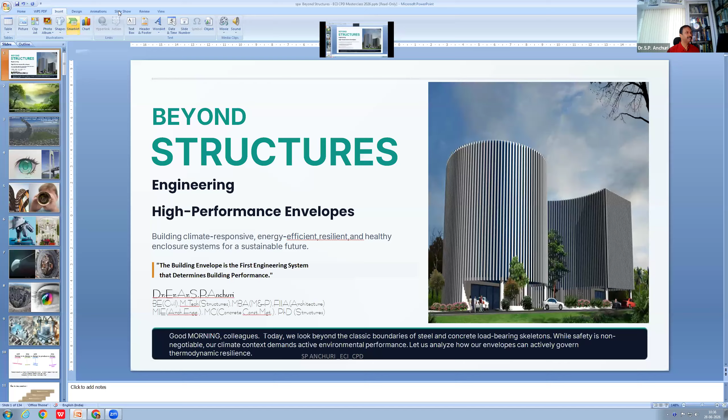Now, today I'm going to talk about beyond structures. We normally discuss the structures and the inner side, but we wanted to discuss something which is outside. So first of all, I would like to welcome you to my talk, and namaste everybody, because there is a cross section of the construction industry. What I'm seeing is all very eminent people have joined. So once again, namaste. In fact, from Pan India.

So the engineering of high performance envelopes, what it will be. Today we know the building should be climate responsive, energy efficient, resilient, future ready, healthy enclosures, which can be a sustainable future. And in fact, friends, the building envelope is the first engineering system, and building performance depends on that. So envelope is a very, very important thing. So good morning once again.

Today we look beyond the classic boundaries of steel and concrete and load-bearing skeletons. While safety is non-negotiable, our climate context demands active environmental performance. So let us analyze how that governs and how that particular system is synced with all other systems. So my presentation is a little different than the regular pattern. I'm trying to put it in a different format. I hope you all will like it.

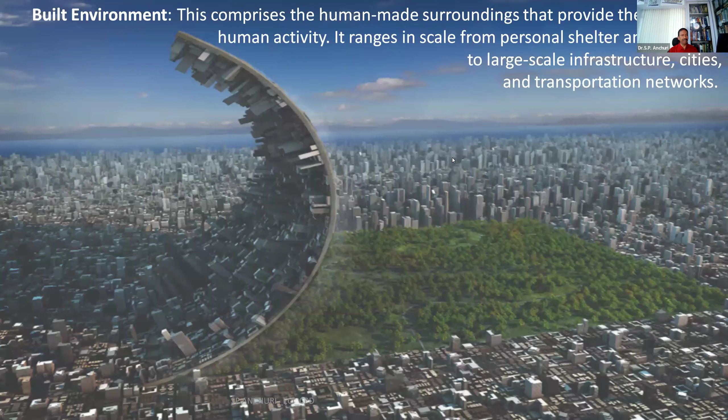In fact, when you think of the built environment, which comprises so many things, the human activity, basically what I'm talking about today is a man-made world, which ranges in scale from personal shelter to buildings to large-scale infrastructure, cities, and transportation networks. When it comes to the built environment, buildings are predominant. So how we need to integrate, how we need to think as a collective approach, that we will discuss today.

But when it comes to buildings, we have several types of elements in them. When it comes to the exterior, which I normally call an enclosure or envelope, they are all microscopic. We go a little closer. Bridges will be at a distance, dams will be at a distance, and some structures will be at a distance, but buildings are very near. So those are called microscopic structures.

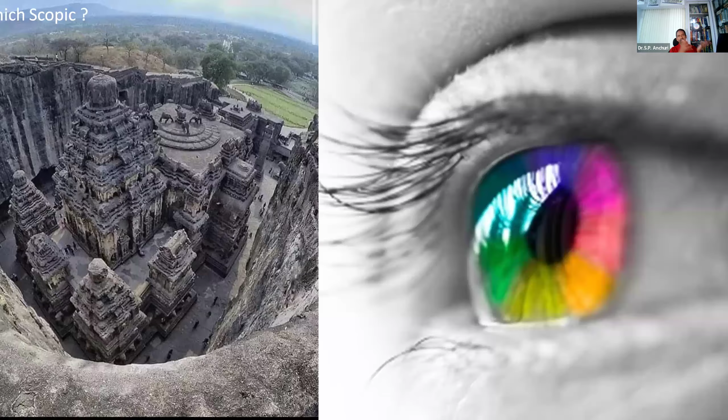But friends, when we go back 1,000 years, 2,000 years, some 2,500 BC, the master builder was the responsible person for everything, right from the planning, the designing, the construction or execution, and the operation and maintenance. The entire life cycle was under one person who was called the master builder.

That may be a temple. Like you see these carved structures at Ajanta, Ellora, Hampi, Badami, or even Mahabalipuram, these things are what scoping? Whether it's telescopic or microscopic or nanoscopic, that I need to decide. So everything they were thinking at a nano level. So we need to understand this.

But when I'm talking about today and the future, the entire thing is taken over by mechanization, automation, artificial intelligence, 3D printing, robotics. The other day, one post was very viral: one doctor is sitting in one country and he's operating in a hospital operation theater in another country. So that is medical engineering; to what extent we have gone.

So artificial intelligence, natural intelligence, and human intelligence have to come together. Even if he's sitting there, he has to operate. Means human intelligence is above artificial intelligence; the person who knows artificial intelligence will naturally have more of a command, be more result oriented. So where are we going?

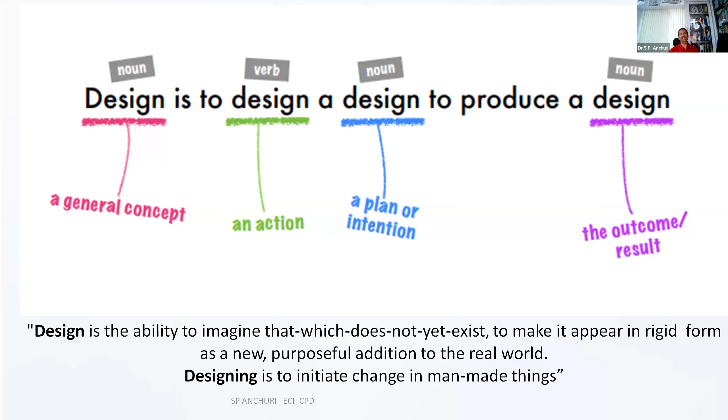Friends, designing is to initiate change in man-made things. And engineers have a very, very important role. And when I say engineer, it's not just civil, mechanical, electrical; there are more than 20-25 streams. And I'm happy that I'm a part of the Engineering Council of India as a member and PE, where all these different stakeholders come together and build the nation.

Friends, when we started about 25, 30 years back, I think the disciplinary approach was more. Instead of cross-disciplinary, multidisciplinary or interdisciplinary, they used to concentrate on their own disciplines. But today, with advancement and industrialization, every sector is developing. For example, building information modeling or any automation, everybody has to come together. We can't work in isolation or in silos.

But today, due to this new generation thinking or future scope designs, multidisciplinary or interdisciplinary is also a little lacking. So what we need is transdisciplinary. We need to know what for you are doing, when you have to do it, how you have to do it, and what goes behind the thinking process of that particular thing. Then only we can come up with vital results. That is transdisciplinary.

And what is transdisciplinary? In my understanding, it is conceptual frameworks that are adopted as a wider perspective within research and practice. Even though they may have their origins in one discipline, they have grown to be used across multiple others. I have practiced this for about a decade now to bring out buildings and the built environment. Basically, I am in the building sector. So we can see how transdisciplinary concepts can be utilized to make those buildings high performance.

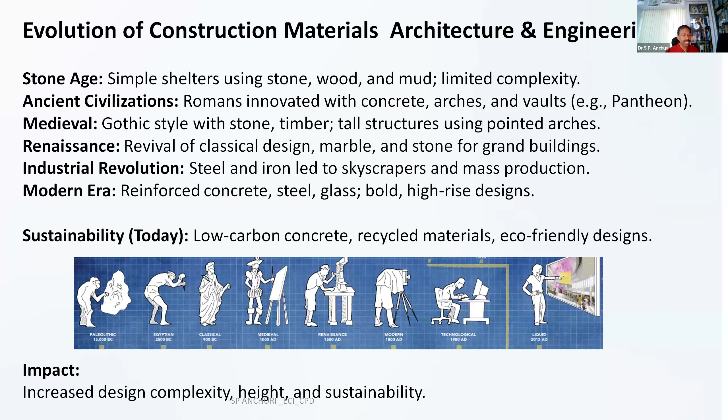Yes, you are somewhere in the corner of the world, but we are connected. So a lot of energy is saved, but we need to understand the logic behind that. Coming to the structure, which is an integral part of designing architecture.

And when it comes to the synergy of architecture, structure, form, and all the things, I'm taking the word architecture because the planning starts basically from the architect's table or the architect's mind, and then the entire thing follows. So when the architect designs, in fact, being an architect and structural engineer with a kind of multidisciplinary engineering education, I understood that the thing starts like story writing.

When you write something, then the entire picture follows, and every element, every person in the entire movie making or that particular design or whatever object, I think everybody is important. So here we need to understand each role and then club accordingly.

To start with, the projects in which we are involved: for 25 years I have been involved in projects right from CM to CM. That may be a common man to the chief minister, or very prominent buildings at the same time. Very simple buildings I also undertake, and I involve a transdisciplinary conceptual approach.

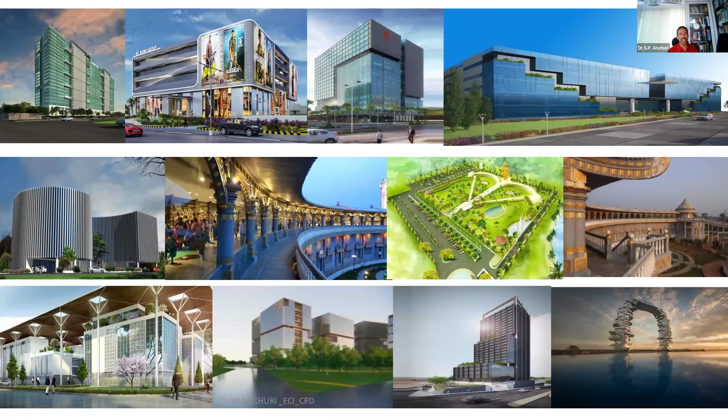So there are some typical buildings which I have done, right from the mythological part to modern buildings, temples, and whatnot. I mean, different kinds of institutions, glass buildings with different forms, and all. So I was fortunate to be involved in these projects for long. There are very few which I wanted to just

inform you about. This is one of the heart-touching and my favorite, the Anchuri family's design, in Vijayanagaram near Visakhapatnam. This is a mythological park. About 24 years back we designed this, and it is in an arrow and bow shape, where the entire Ramayana is depicted in the form of three-dimensional sculptures.

On the ground floor, first floor and other floors, we have Veda Patashalas, Agama Shastra research centers and other things. So it's a very typical thing. Not only structure, not only architecture, not only building services, but here the involvement of Agama Shastra and the sthapatis was more. Accordingly we need to have that.

If I design a hospital, doctors' input will be there. If I design a temple, I need to have Agama Shastra and sthapatis' input. Every element we have to take care of. That is nothing but a transdisciplinary concept.

When it comes to structures, there are several types, which may depend on the structural system and the forms: one-dimensional, two-dimensional, three-dimensional structures. Based on the application, whether it's a bridge, aqueduct, canals, dams, railways, roads, and airports. Based on the materials, for example timber, concrete, metal, aluminium, whatnot. Today we have a good number of products which can be used.

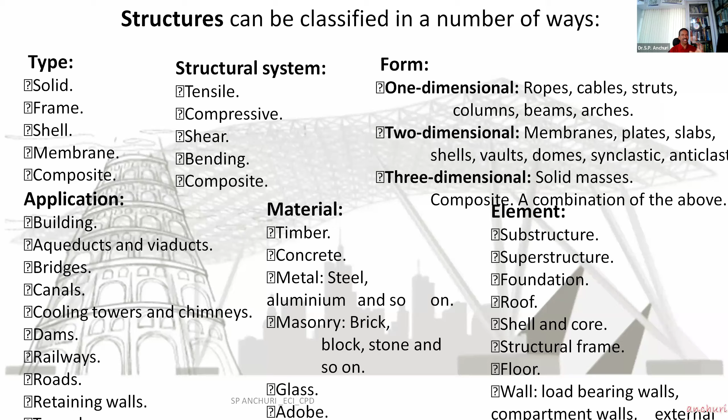But today we have 100 variants in each company, and n number of automobiles: electric, diesel, and whatnot, with different fuels, different manufacturing and different types. So it has grown. And element-wise structures may be superstructure, substructure, foundation, roof, floor, walls, shells, and all. So which element is going to be part of the structural system as an envelope, we are going to see now.

But for any project, as we have the Panchamahabhutas in the world, I think planning, designing, execution, operation, and maintenance are very much required for the balanced design life cycle of that particular project or building. But for any project to be thought of, feasibility is the starting point.

Functionality is what the space is used for. Technology, the engineering of the building, endless options are there. Sustainability, which we have been learning for a few decades, is the need of the time. Innovation is the design, shape, and construction. But friends, today we are going for beauty, aesthetics. It should look good. But I think correct is beauty, but beauty is not always correct. These are my common slides in every talk, because they are basic fundamental things.

But structure is not only a structure. It's like the inner engineering we have. It's my body, I may be fit, but my inner engineering should also be fit. Only aesthetics or only the body is not enough.

For example, I have a phone, a system - everything hardware is good, but we need software too. With programs and everything working collectively, it can perform well. So today we are going to talk about the structure or building which performs well, which is the need of the hour. Before going into that, I wanted to relate the structure and the space.

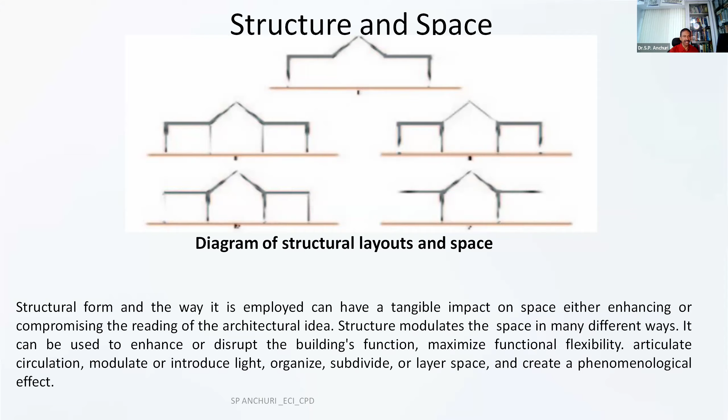In this particular picture, you can see structure for enhancement or disruption of functions. Sometimes, like the Leon School of Architecture, it looks good but disrupts the entire space. When the structure is effectively used, it can help define the nature of the space. The structure can also disrupt the function of a building wing, but this is rarely the deliberate intention of the architect.

So we need to understand the basic function. At the same time, the space is what we are designing - whether it's column-free space, or whether height and headroom are also very important. So this is structure enhancement - in this particular case, structure for maximizing functional flexibility.

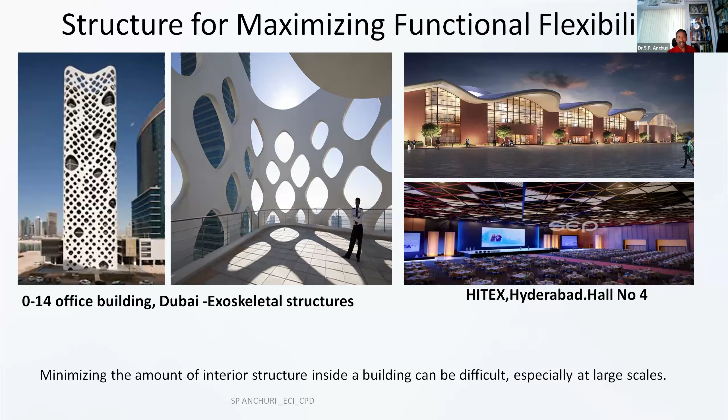On the right side, the HITEX in Hyderabad, Hall Number 4, is one of the biggest in the country, where you can host about 10 to 12,000 people under one roof. It's not like Bharat Mandapam, but it's multi-purpose and recently came up. Minimizing the amount of interior structure inside a building can be difficult, but for large structures today we have the technology, so structure should be designed accordingly.

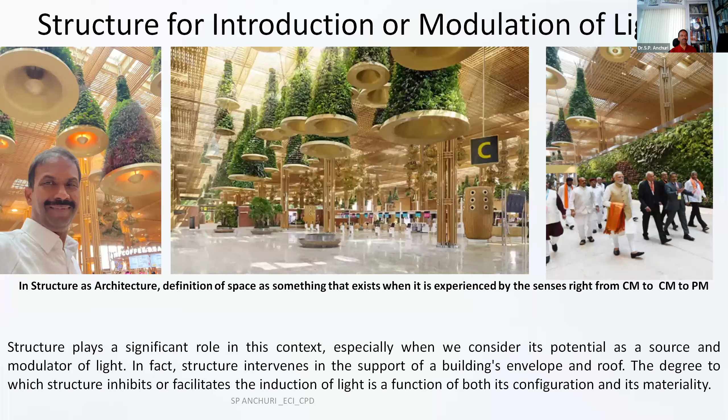The structure for introduction and modulation of light - friends, you might have seen this particular structure, the Bangalore new airport, based on bamboo design, with natural ventilation inside. The Prime Minister inaugurated it a few years back, and this is one of the favorite facilities which can be enjoyed thoroughly - not just for flights, waiting and shopping, but you can feel the difference when you go inside. It's one of the wonderful projects, as per me, in the present time.

Now, structure for organization, subdivision, and layering of spaces - that may be the atrium, the facades, or a freestanding row of columns. So this particular thing has to be integrated accordingly.

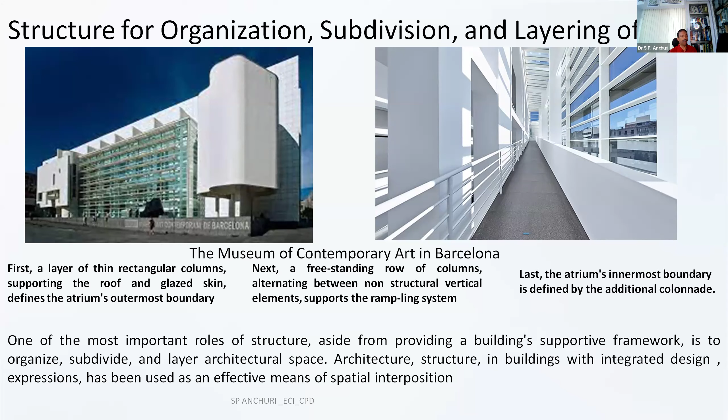This particular building is our own T-Hub, around 11 stories, 3.5 lakh square feet, which is an incubation center - when enterprising minds come here, they get instigated or influenced to do better. Startups, corporations, government, academia, and investors drive transformative changes here. This inner courtyard and these external aspects or prospects definitely attract people, giving a different kind of output.

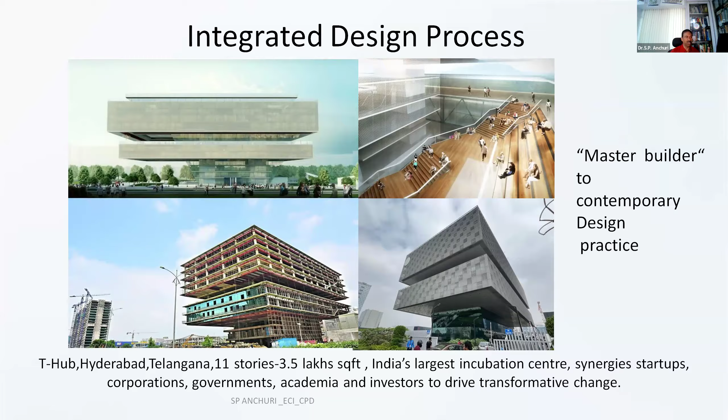So the structure plays a vital role. Is it a new thing? I don't think so. Ornaments in the temple and buildings, if you go to the south or any temple, Madurai Meenakshi temple or Surya temple, Mohenjo-daro, Harappa, or Khajuraho, or any structure, when the ornament and structure become a single thing, strangely enough, the result is a new feeling of freedom.

So they have their own methodology of thinking. They follow some kind of rituals, some kind of ornamentation. So we need to sit with them, and then we have to design and execute accordingly. It's a very wonderful experience, in fact.

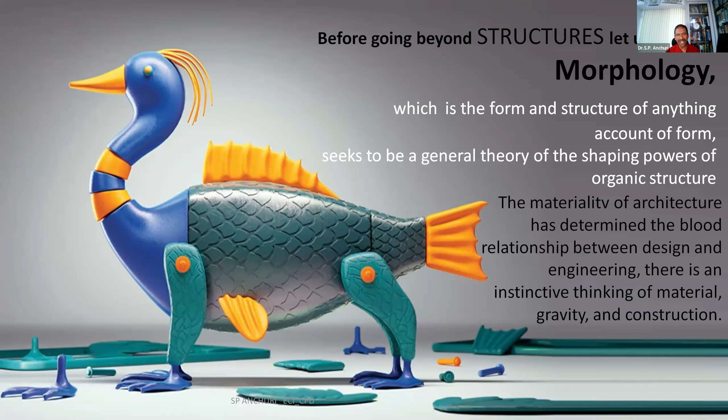Friends, coming to any object, for example, when we were kids, today we are going for more screen time. But in our times, or even today, we have that exercise. Today we are thinking of national education policy, where we must have some kind of exposure to the practical thing, and have talked to AICTE, where the first year, second year, third year, they are going into the industry or the field and trying to understand.

But when we studied in the 80s and 90s, or even before 2000, we had carpentry, smithy, electrical, everything. First year was common for all the branches, all subjects were compulsory. We went to each of the experimentation and laboratories. So we have different types of that logical thinking. I think that particular virtual thinking is to be improved when you are having a practical logical approach and when you touch those particular objects.

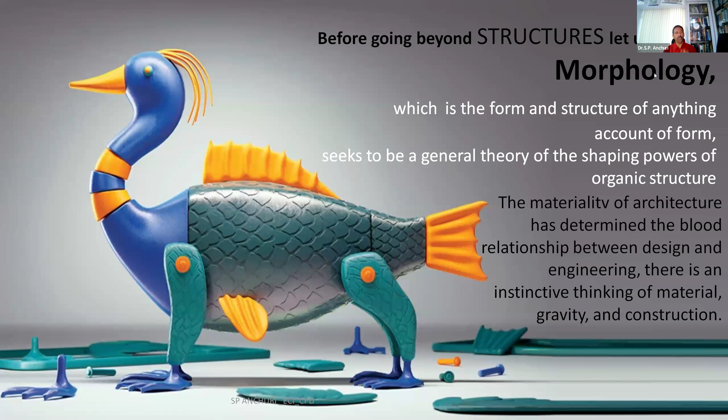So this is what in terms of structure. Before going really into the beyond structures, I think morphology is very important, which is the form and structure of an object, where anything is on account of the form, seeks to the general theory of shaping the power of organic structure. The materiality of architecture has determined the blood relationship between design and engineering, and there is an instinctive thinking of material, gravity, and construction, because the load part is very important.

So it's a very simple picture, but once you dismantle this, then we need to again assemble this. That's what the kids, they grow their thinking, challenge, and capacity through this mind exercise. So that's the beauty of building. Building is also an assembly of all the elements, joints, and each element is different, having different age, different output.

So that's what is the collective building, like a machine. Now, when it comes to different typologies, I will quickly go through 1001 Building Forms, very fast, which was the work by Francois. On the right side or left side, this is Frank Gehry's project, and the other side is a simple box element. If you go through Frank Gehry's works, he takes a sheet and he does like this, and this is predominantly the envelope or enclosure of the buildings.

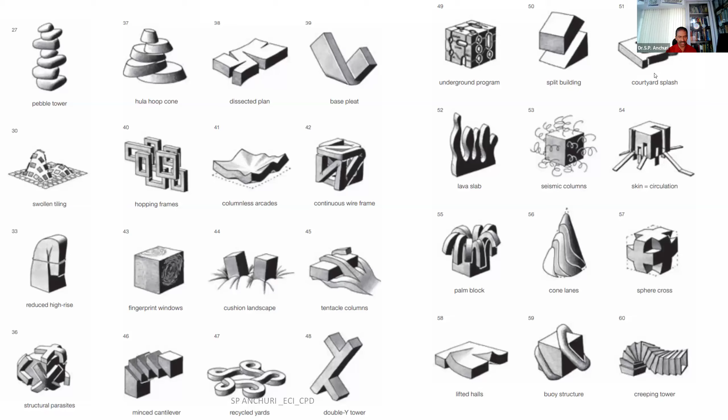So here you can see the forms of different buildings. These are all existing buildings, forms, which somebody has done here and there on the earth. This is only a collection of those basic forms. That may be a monument, that may be a building, that may be some kind of structure. So here you can just see how the list goes.

So these are all envelopes, these are all enclosures. Somewhere, maybe even Lotus Temple, Baha'i Temple, Burj Khalifa, Norman Foster's buildings and other things. Just see how there are these 1001 building forms by Francois Blanciak. You can just go through his beautiful book, how he has detailed these things.

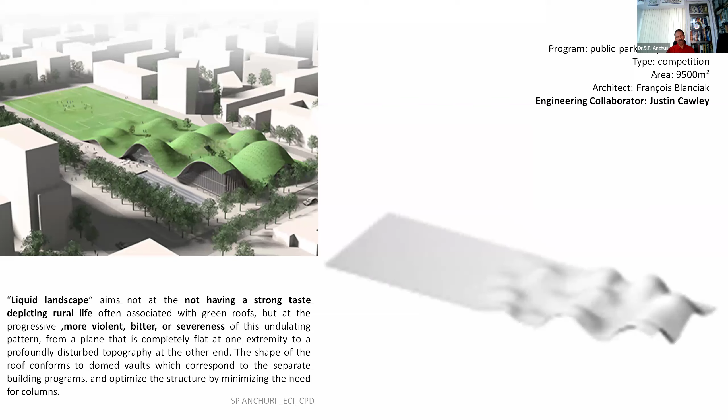So, friends, if you see, when the proposal comes, I'm reiterating and emphasizing the role of the engineering collaborator here. You may be having some idea of mechanization, some kind of idea of revolving it. So if you take the example of architect David Fisher, who is one of the dynamic architects, or James Law, they have different types of products.

Particularly David Fisher, his plates are moving - plates in the sense floors are moving or rotating. So how are those rotating? It's not only the structural engineer, not only the mechanical engineer, we need an automobile engineer, we need to control the aerodynamics of that, we need to construct, and also there are about 20-25 agencies required.

When I got the opportunity to talk to him, he said right from day one, when I think of something to put on paper, I concept it. For example, I want to have a speed, wind speed and all, I speak to Ferrari people if something is joints and fasteners, or to Bosch experts or wind analysts. So everybody, he takes the clarity and slowly forms the particular structure, form, which is the envelope.

So here you can see one side it's a lawn and play, and the other side, imagine when you walk on a carpet somewhere, if you have undulations - that became the project. This particular team has made such a wonderful arena, because sports facilities and other facilities are used by few people, but seen by many people. And being in the heart of the city, that landscape should be merged with the entire landscape.

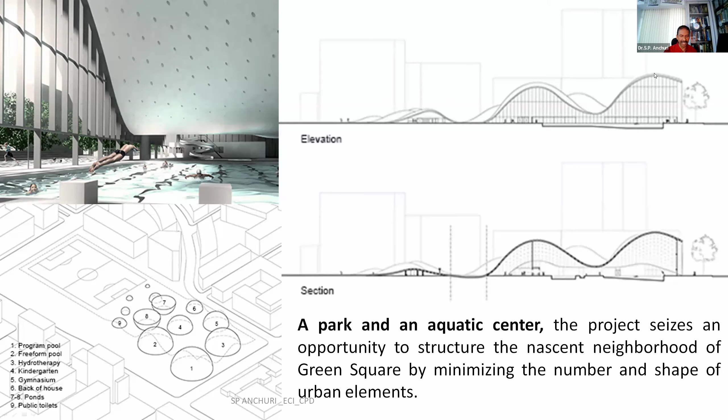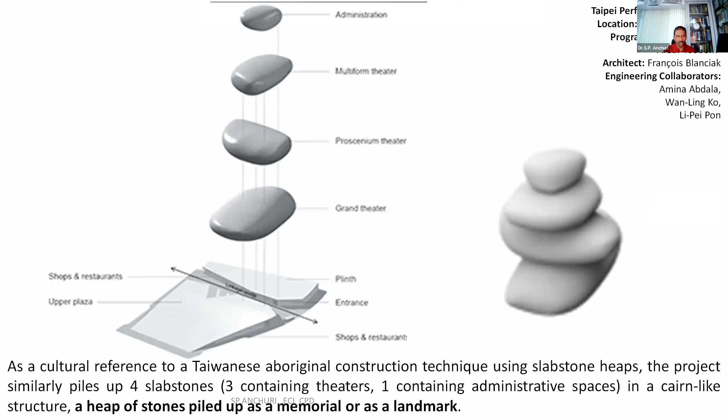Some people go for the flower of the nation, but even in Hyderabad we have rocks, so in this particular area these kind of monuments are more. The idea behind the development of this is like this - for example, how structurally they kept it, and how the overhang.

So inside the structural system and outside, for example, the other day I was talking to Abhayji, who is an expert in statues. For him there is no choice - if you want Sardar Patel in standing position, he has to take that position and do entire analysis. He can't change even one wrinkle on the face, or any shape, size or proportion of the human body, because it's true scale, like a portrait. So his challenge is something different.

You can go through his works - his company's name itself is Skeleton, because there's the skeleton and the envelope. So today I'm talking about the envelope, but we have to integrate that.

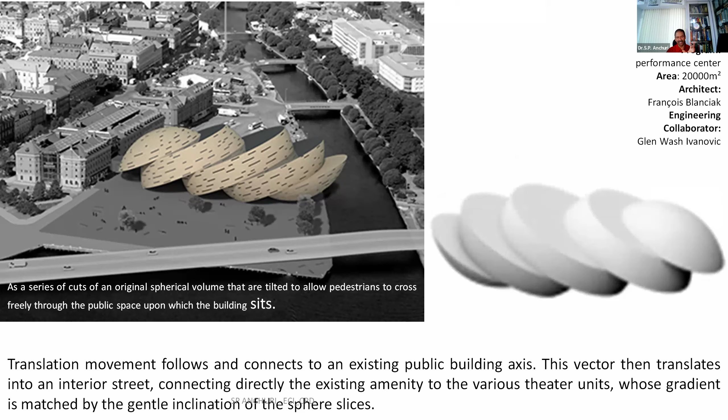So you can just see how the ball started, and the sphere, then they cut, and based on the orientation they angled it, and the generation of the form happened. So here's another important one - 23 spheres came together, interlocked, and were dissected or bisected within, and they came up with this particular beautiful project.

We had different eras. For decades, we mastered the structures. Yes, I'm not having any doubt about the structures. So, in terms of earthquake resistant, wind resistant or disaster resistant buildings, we advanced in structural analysis, design and execution. Considering the legacy of the projects, the robust concrete frames or solid brick infill or raw structures, we calculated safety with outstanding precision.

No doubt about that. However, this absolute focus left out building dynamics, or building thermodynamics. We forgot about building physics, creating massive energy-guzzling structures that rely on HVAC brute force to remain occupable. We have come from unconditioned spaces to conditioned spaces. Everything is air conditioned, whether it's, say, for machines.

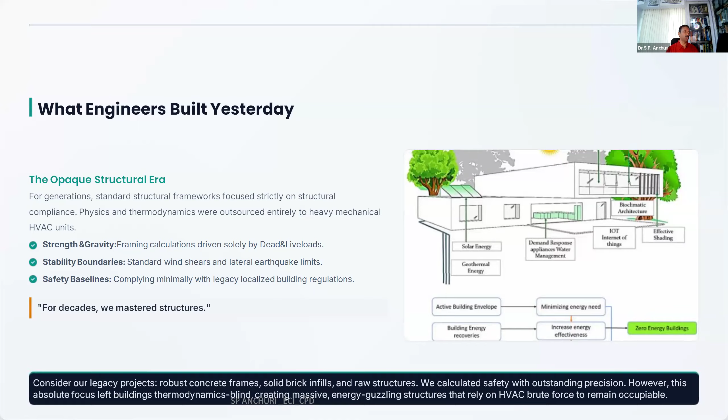I think nature has no condition at all. In a forest, no pesticide, no watering, it grows on its own, it's nature. So why can't we have our own building or system which is nature-based? I think we need to have less of active, more of passive. There, the engineer's role is more. So what must engineers build tomorrow? I think passive environmental systems.

As a building services engineer, you can reduce the consumption of energy in operation. But as a civil, structural, mechanical and electrical designer, you can reduce the energy during construction itself, because the form, the shape, the material used is also consuming a lot of energy. So for me, if you reduce the embodied energy, you are achieving good carbon footprints.

So here we need to harness natural daylight, breathe during the pleasant ambient hours, and maintain indoor thermal stability even during full power outages. I designed a number of buildings, and even where I'm sitting, my own small 8,000 SFT multi-floor house is a purely energy plus design. I generate my own power. I have good daylight and other things. So there is no air conditioning, or hardly I use any air conditioner in a year. So we need to understand that.

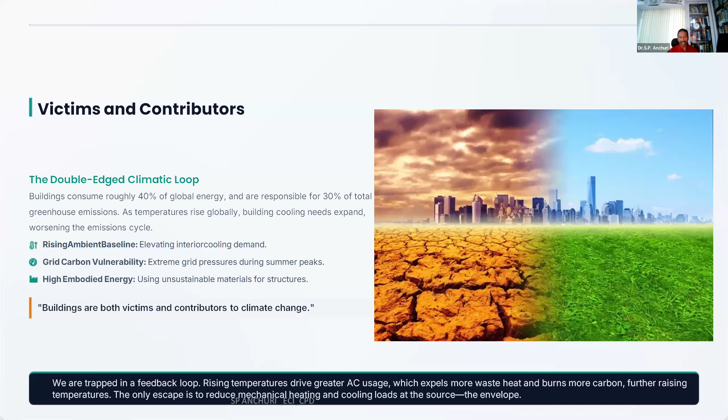So who are the victims or who are the contributors? I think buildings are both victims and contributors to climate change. We are trapped in a feedback loop. Rising temperatures drive greater AC use, which expels more waste heat and burns more carbon, further raising temperature. In fact, the only escape is to reduce the mechanical heating and cooling loads at the source itself. And the envelope should be designed accordingly.

So our future climate is already arriving. We need to understand the Indian heat wave is a reality. In fact, see the temperatures of the cities. If you take Delhi, it goes around 47 degrees, and Nagpur 50 degrees. And in most of the cities which are experiencing 30, 35 degrees today, the humidity level or the heat, the climate is different.

So we need to understand what the man-made interventions are and how we are spoiling it. The future of the climate is already arriving. We need to be very careful, at least for the upcoming built environment, and you can correct the existing buildings also. So cities are becoming a heat trap.

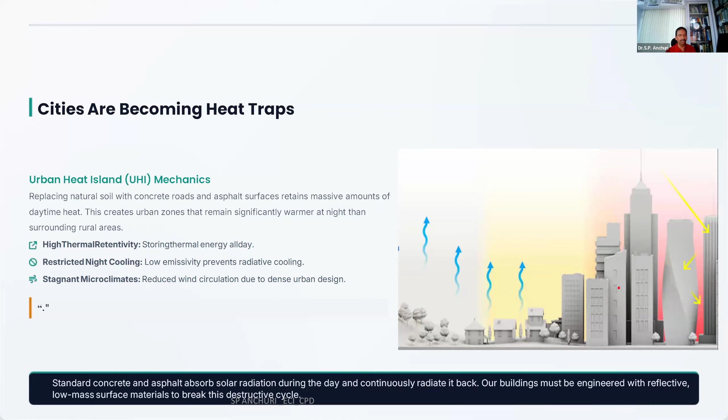Standard concrete and asphalt absorb solar radiation during the day and continuously radiate it back. Our buildings must be engineered with reflective, low mass surface materials to break this destructive cycle. I think we need to understand the urban heat island mechanism and then go for the design collectively.

So resilience is the new safety. We had fire safety, we had earthquake safety, so all types of safeties we need to design. Suddenly our zone 2 becomes 3, 3 becomes 4. But what about the existing buildings? So we need to design the buildings with the future in mind, leave out the present.

So based on the past, we have to design the present, considering the future. That's what the future ready building is. So resilience is the new structural safety. The traditional structural safety focus ended once the building stood firm. But today, we must guarantee complete water tightness, complete structural envelope integrity during severe storm.

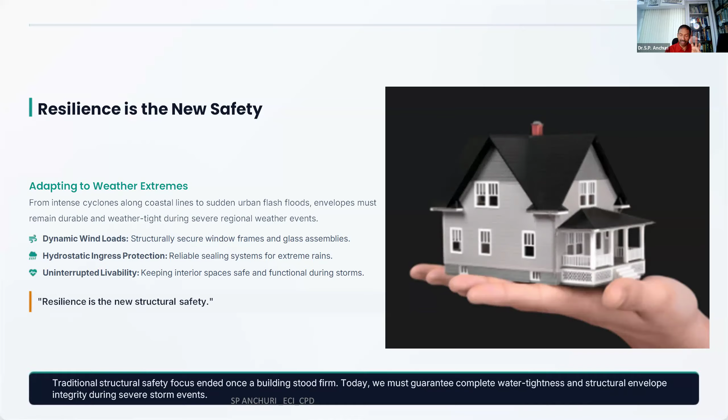Friends, envelope is a building interface, which is the roof or opaque walls. I always say, when a dot travels, it becomes a line. Line travels, it becomes a plane. When a plane travels, it becomes a solid. But earlier, our structures were solid. That may be a pyramid, that may be any kind of monument. They were not hollow, they were solid. For example, the pyramid was solid, but today's pyramid is hollow. So today, the requirement is different.

The function is different. So we need to understand the complexity of the geometry of the structure, the flow of the systems, and then we have to go with the interface. So the envelope or looks is the same, but inside it's hollow. So think of the envelope as a continuous wrapping; any break or poor transition between the roof, walls, and glass will compromise the entire building's energy performance.

You should think of it as a body, a human body. The other day I was talking about the anatomy. Even if my one finger pains, my entire body is going to be disturbed. So we need to understand each element of the building and then go about it. That's why I was comparing the human body and the envelope, where we have thermoregulation, airflow, moisture management. Buildings breathe, gain heat, lose energy, just like humans.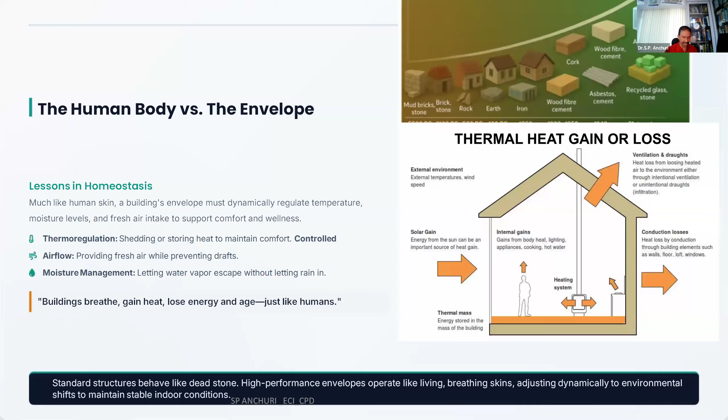We do Kapalabhati, we do breathing exercises, but for the building where we live, are we giving the required fenestration, the required air change? A toilet needs more air change, a kitchen requires more air change. No one thinks of that. So we need to understand each element in the office or any space, and we need to design accordingly. That is what I was comparing with the human body.

Now, thermal imaging analysis. Today we have everything. Earlier it may have been a little unavailable, but today we can simulate it. We have DesignBuilder and so many good software where we can simulate. Before even going for the final design, just like we analyze our structure, we can analyze our structure as a whole, as a body, as an envelope.

So where we can put the fenestration, where we can put the openings. Energy leaks are often invisible until measured. So we need some kind of scanners or systems where we can check the strength of the concrete, check the strength of the beam element. At the same time, we can study the performance of that room, the performance of the entire structure. So that is what we need to go for.

So building physics is a very, very important subject. Laws of physics are very important. We must know what is conduction. We must understand what is convection. We have to really seriously think of radiation. Pure heat movement through solid walls is conduction. Convection, hot air drafts circulating through envelope joints, and radiation, direct solar heat transmission through the glass. I think we studied this in the third or fourth standard.

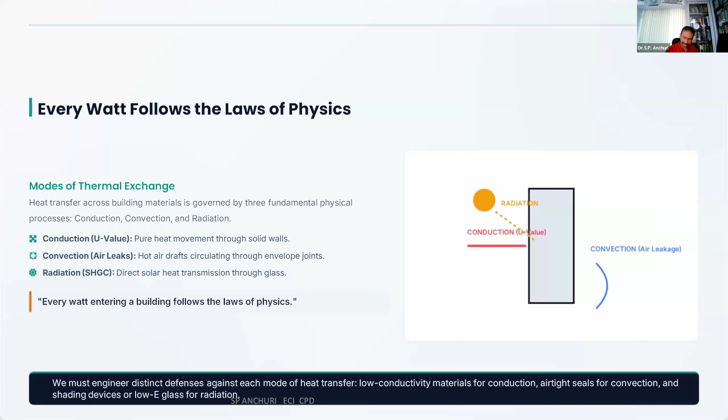We need to understand what is R value, what is conduction, what is U value. I can't have the same U value for Kashmir and Kanyakumari in terms of my clothing. Like that, we need to have food, shelter, and clothing accordingly. Now, the cost of uncontrolled solar gains. So, peak overhead solar demands. The sun is free, but uncontrolled solar gain is also expensive.

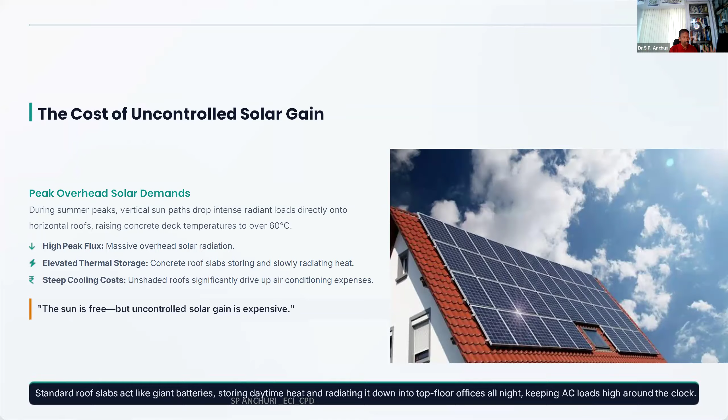We can see you can't plan anything haphazardly. So we need to understand. We need to calculate how much sun is required, how much energy we can produce, how the roofing system can be done, how the AC loads can be reduced, and what kind of a system we can use. So, visualizing the invisible load. These things are not visible. So managing long wave infrared energy is very important. What we cannot see often drives the energy consumption.

Sometimes leakages, we don't know the leakage. It's not only the water leakage. We need to control the leakages. We should not have any leakage in the room, especially in terms of the usage when you are designing some kind of machine type things, data centers or operation theaters and all.

So standard glass allows the near infrared heat waves to pass freely. The energy heats interior carpets and also increases the heat of the glass. So, proper glass. See, for example, my eyes require glass of a different number. Optical glass is different, so I can see properly. Like that, when you are putting some kind of glass, whether it's south facing, north facing, or west facing, see how the heat increases. Accordingly, you need to plan the value of that particular glass. Otherwise, it will be difficult.

So ASHRAE, which is the association for air conditioning and other things, has given a very, very important chart. The comfort levels, how we can achieve them, through air temperature, relative humidity, air velocity. So buildings are for the people. If designed for it, we have to design for the machine. But predominantly our buildings are designed for human comfort. If you achieve human comfort, then naturally machine comfort will be there. As I was saying earlier, computers now are different. Today we are designing for computers or machines for that particular temperature or electrical loads. So we need to understand.

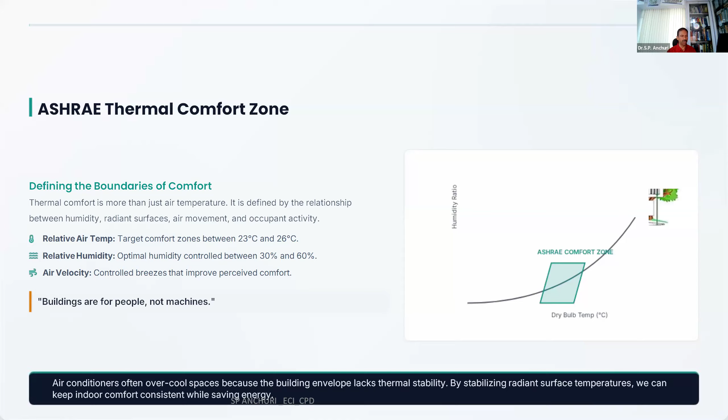So occupant comfort and productivity are related. Create the spaces with a productive mind. You need to have biophilic design. You need to have nature-friendly design. So whether it's a classroom, an operation theater, or a hotel, if the entire thing is going to be the same, say when you close your eyes, your ambience can be felt. If you are opening the eyes, that's only the exciting things.

But I feel when you are closing your eyes, when your other senses are feeling the atmosphere, I think that is required. If you go to a puja room, you know that it's going to be a puja room. When you are going to a hospital, it should not stink. So some places it's required, some places it's not required. A comfortable building is a productive building, and here the envelope plays a vital role.

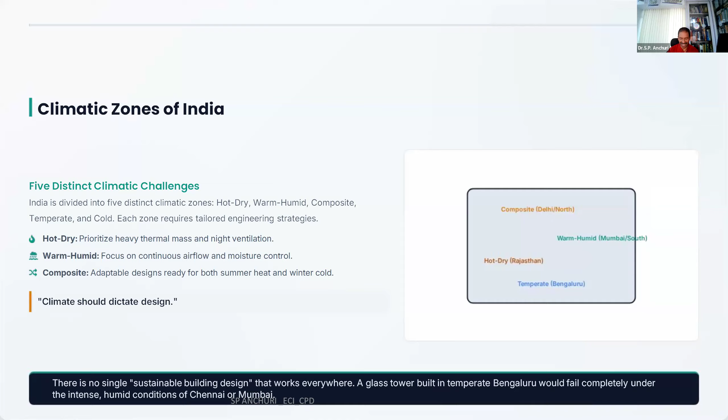Like earthquake zones, we have climate zones in the country: hot and dry, warm and humid, composite. So climate should dictate the design. Design can never dictate the climate, isn't it? So, the heritage architectural lessons. When you go to Rajasthan or Gujarat or places where Havelis or palaces are, there was no power. The building material, the structural systems, all other materials and the planning, the entire thing was accordingly. No air conditioner was there, and still you enjoy that space.

That may be stack effect, that may be wind catchers. Right from the water supply, drainage system, rainwater harvesting, everything can be learned from the past. And our generation, the new generation, the Gen Z, going to the Haveli, taking a selfie and coming back is not enough. We need to have more perception in seeing it. Our ancestors practiced sustainability before it became fashionable. Today, it's more than a passion. So we need to understand that.

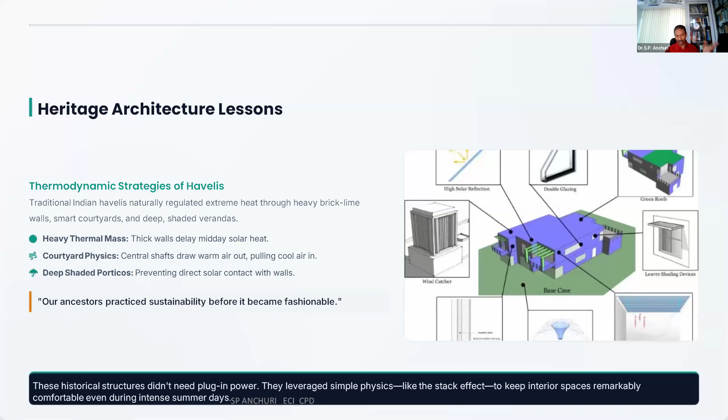See the Jaipur courtyard and Jali screens. If you stand there, you will get a breeze. For example, Venturi effect, when you get cool air.

When you blow out, it's hot. When you take the air in, it's cool. So we need to understand that particular flow and aperture. So passive cooling is a timeless engineering. In fact, passive is always active. Active is active only when the power is there.

Very simple thing. Even in case of fire, you need to have passive things like a staircase or fire exits, or in terms of the fire rating and all. They are all passive. They are always active. But active sprinkler systems and some kind of mechanical system, if they don't work, gone. So passive is more important, and active can in fact enhance their particular working. No doubt they are required, but we need to understand.

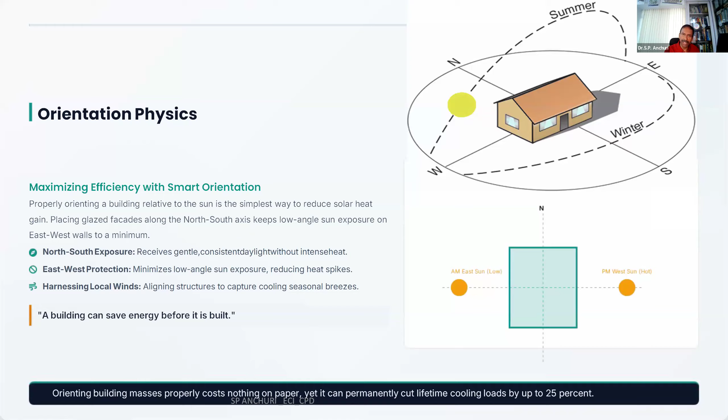For example, if I have a rectangular building, north and south, whether my building should be like this or like this is very important, because the moment you design your building north and south and keep more openings on the east and west, naturally heat gain is going to be more. So where it's unavoidable, you need to design the shading device accordingly. How can it be done? You can see the solar sun path optimization. We can optimize based on the landscape, overhangs, horizontal louvers or vertical louvers.

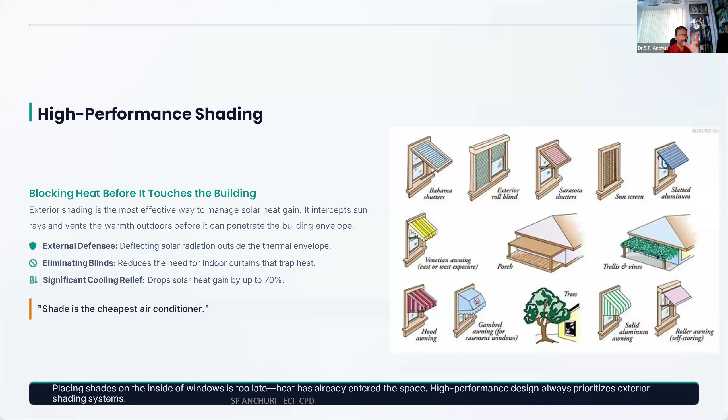So the best energy is the energy we never consume, isn't it? So that should be the practice. Today we forgot all these things. Today you see there is no chajja for the window. High performance shading, you can have different options. What we do is, outside we put nothing, inside we put blinds. You can see even behind me, we have this good shading device. So it's a part of the structure. Here, horizontal overhang geometries are very important.

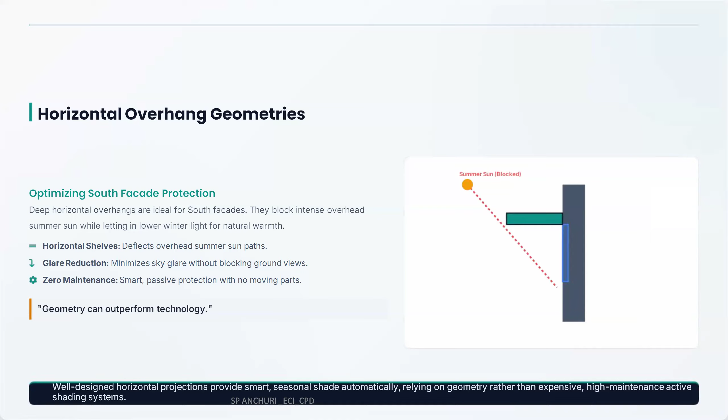If you see Golconde in Pondicherry, the Nizams about 100 years back funded it. A wonderful project. Exposed concrete structure and completely a passive design. So we can really work it out without anything, and the structure itself can be an envelope. So vertical fins optimization. You can have horizontal fins, you can have vertical fins. So design with the sun instead of fighting against it; we need to understand and design our fenestrations and shading devices accordingly.

Now, wind and CFD analysis is very important. Computational fluid dynamics. Now the tools are available. Today we can easily simulate it. So why don't you use those things? There is even an app where you can put the location and the building form, get the CFD analysis, and then design. So wind is a renewable resource too. We need to simulate and use it accordingly.

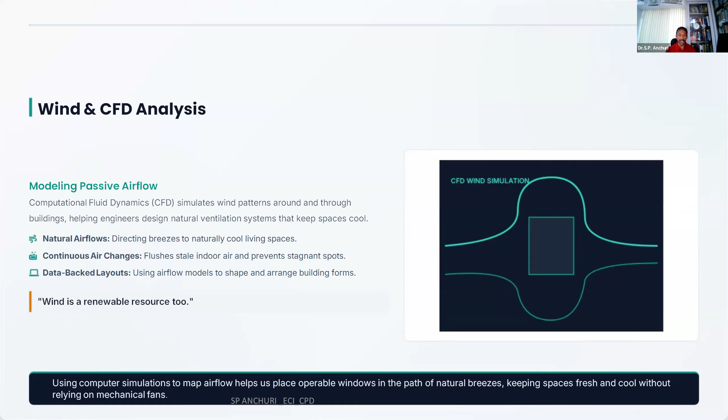Now AAC block, definitely, and where the red burnt brick is used, there we have Porotherm and other things.

But AAC block. Devpal Singh, can you please go on mute?

Anyway, I'm trying to talk louder than him. So AAC block versus the red clay brick. When you compare AAC with red clay brick, AAC has a very low U value and a very high R value. When you replace brick with AAC, your building is structurally sound because of the beams and columns, so these walls are only partition walls or shaded external walls. If you have shading for the external walls, you can definitely go for such a system, which will reduce the energy by 30 to 40%.

So insulated walls. Today we are talking about 50, 60 storey buildings where the concrete shear wall is a must. A concrete wall is definitely going to heat up and its U value is too high, which is not recommended, but the structural system is required. We are going to have an envelope of concrete, so how to go about it? If luckily you have a core wall and hollow core external walls, to some extent it can work, but you can have insulation from outside. Say, if I am going to Kashmir, I will be having insulation with good R value.

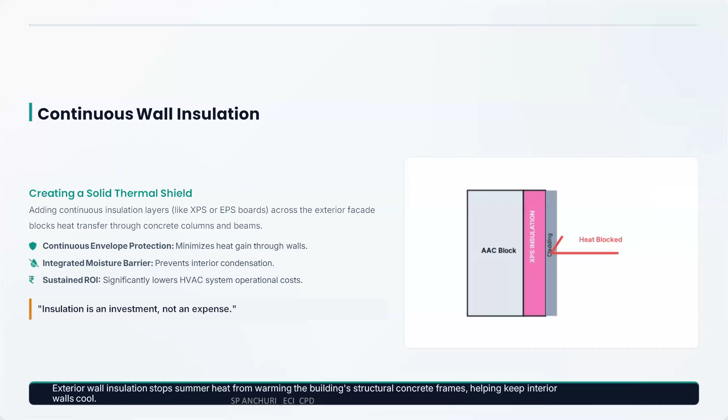So insulation is very important. Thermal bridging is very important. Heat finds the weakest part. We need to understand this through visualization. There are some kinds of machines or scanners available.

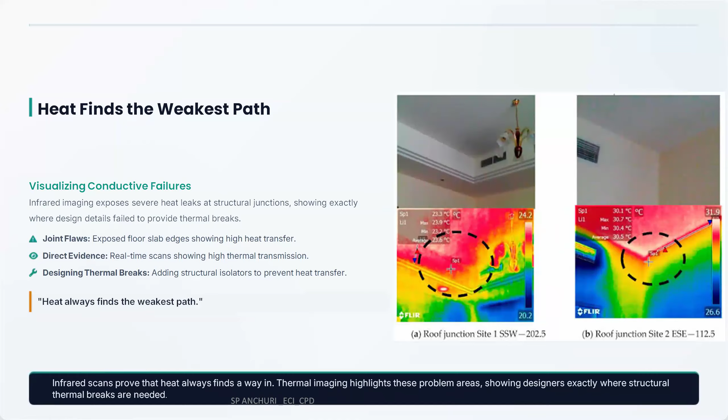We can check dampness. At the same time, leakages we can check. So definitely we can check the things. Here glass inspires the architecture. So here you can see the glass-inspired architecture, but it's challenging the engineering also. So we need to have proper SHGC values and properly designed DGUs and all. Definitely a glass box is not bad, but we need to design accordingly.

So single or double glazing. In fact, we go for triple glazing also for southern walls, western walls. For the north wall, you can go for single glazing, but for western and southern, that depends on the heat ingress. You can check it and accordingly plan it.

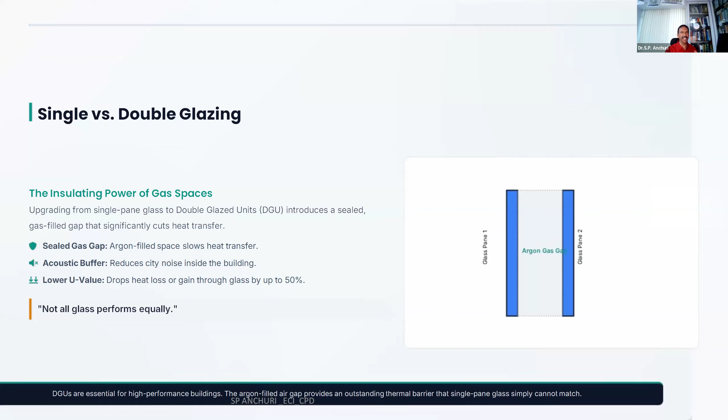Now, low-E coating technology is also very important. The glass which is coated with the low-E coating reflects the heat. The light will come, but heat will not come. So I have a lot of skylights in my projects, even in my house, where I can get the light, but that reflects the heat. So that we can plan it out.

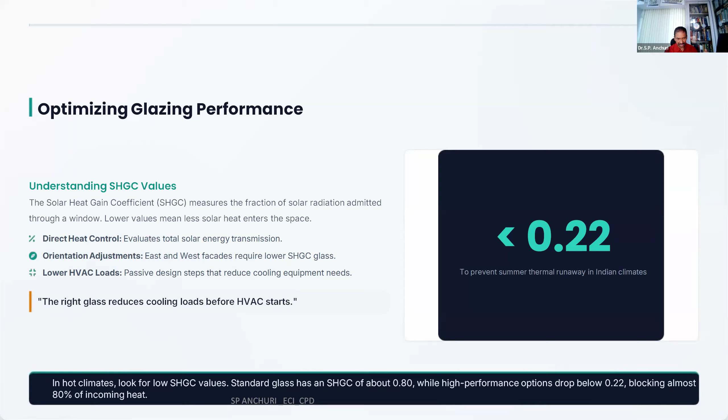So optimizing glazing performance is very important. The right glass reduces the cooling loads before HVAC starts. So we need to understand how much should be my SHGC value and all. So daylight harvesting is very important. You can see in earlier courtyard houses or villages, they don't require any lighting, daylight. Even the design, special design, from Suryodaya to Suryast. Why do you need light inside when you can take the light from nature?

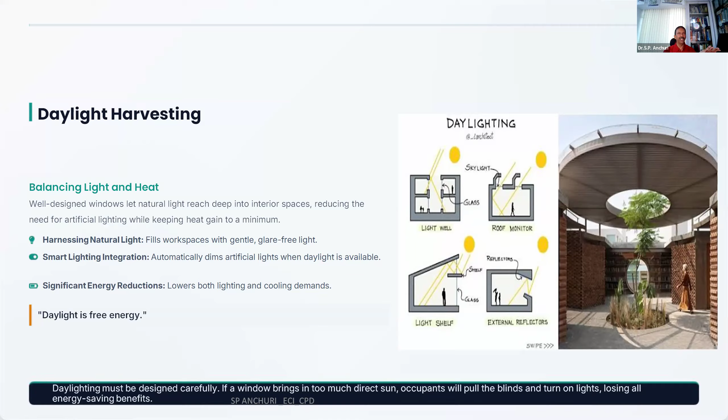So you take the light from nature, from Suryodaya to Suryast, generate the power, store that, and for the rest, Suryast to Suryodaya, you can utilize it. I think I'm not even paying any bill to the government for 12 years because my building is a net zero building. So in fact, I'm saving and storing that, because they don't pay back, but at least they neutralize it.

The danger of overglazing. It doesn't mean that you go on putting glasses and all. Where to put the glass? See, this is another irony of our mindset: they have seen something in Japan, oh, the same thing we are putting here. It's not. So we need to see, yoga is always better than aerobics. No doubt about that. So here, local things we have to see. We have to have a combination.

How much should be the glass? How much should be the wall? What percentage of glass do we have to use? How much opening penetration? It's a good science. So this is the window to wall ratio. This is very seriously given in NBC 2016, and it's a part of the Bureau of Energy Efficiency ECSBC, Energy Conservation and Sustainable Building Code, and we are practicing that very seriously in Andhra Pradesh and Telangana because it's mandatory.

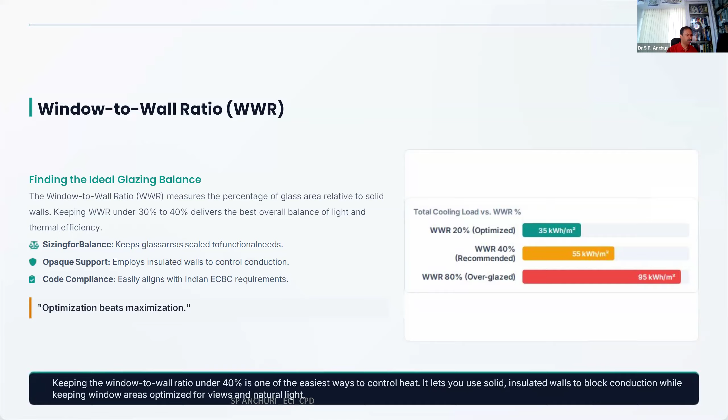So, what is the window to wall ratio? How much is the wall? Which side is the wall? How much thickness is the wall? How much percentage of opening is required? Are we going to do it? I think we need to do it because this is a structural system which is going to be the external facade. How much opening you are putting, whether it's a shear wall, a partition wall, or a load-bearing wall. I think we need to understand where to put, how to put, and what to put. Then optimize, which beats maximization.

So here, as per me, the envelope is maximum. The roof also, isn't it? So the terrace or open to sky directly undertakes the heat, we have ingress. Naturally, in a multi-story building, only the top floor is under the roof, but there, the Telangana government has come up with the cool roof policy, and other governments are also planning. The roof receives the building's highest solar punishment. So we need to understand.

So what we are doing is false ceiling. We are putting some glass wool inside, but we are not treating the roof. Upper floors have the false ceiling. Putting the banyan inside won't give me much. In case of a raincoat, I can't wear the raincoat inside. I have to put the raincoat outside. Like that, we need to wrap something which stops the heat ingress in terms of the building enclosure. So when I'm saying enclosure, the structural system should be accordingly.

So cool roof technology: here we had the Telangana cool roof policy, where I was one of the instrumental people in the policy making and even implementation. So every building which is more than 2,000 square meters must have this cool roof coating on the top. But again, it's not only total cool roof. We need to have power roof. We need to have green roof. We need to have normal roof. So everything which reduces the consumption of energy inside is welcome.

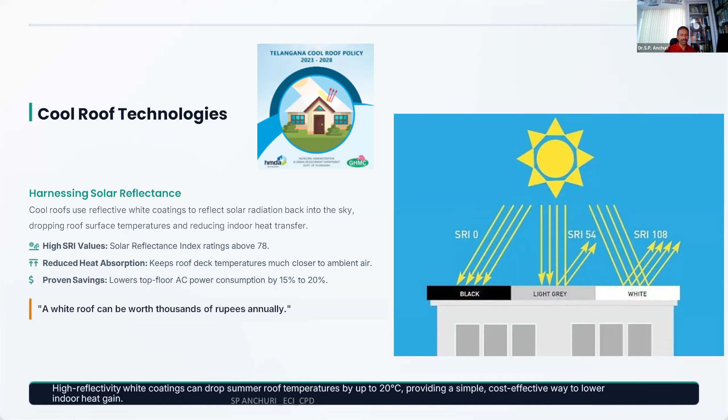Reflect the sunlight, reject the heat - that is the purpose of the main roofing system. Wherever possible, you can have living green roofs, which give a substantial reduction in energy, because nature can be a building material.

If you are planning some kind of pergolas on the top, why don't you go for a hybrid? Today we are getting transparent solar panels, which you can see from the bottom, you can see the sky. Such developments are there. We need to update ourselves, we need to use it accordingly. Every roof is a potential power plant.

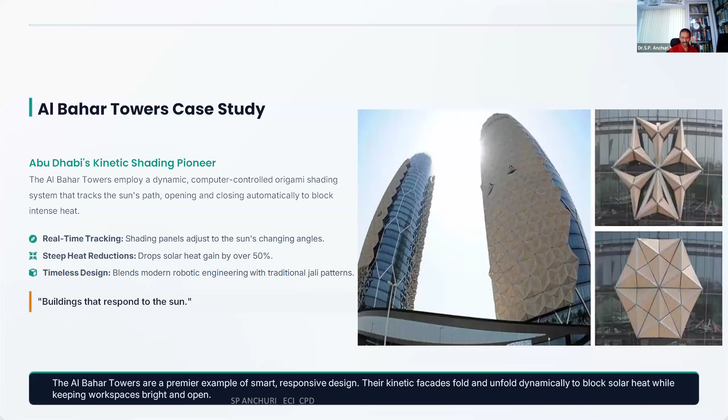One of the best examples, as per me, is Al Bahar towers - you can see the glass, and whenever based on the requirement, the openings and closings, the building responds to the sun. So it's a climate responsive facade. That is the need of the hour.

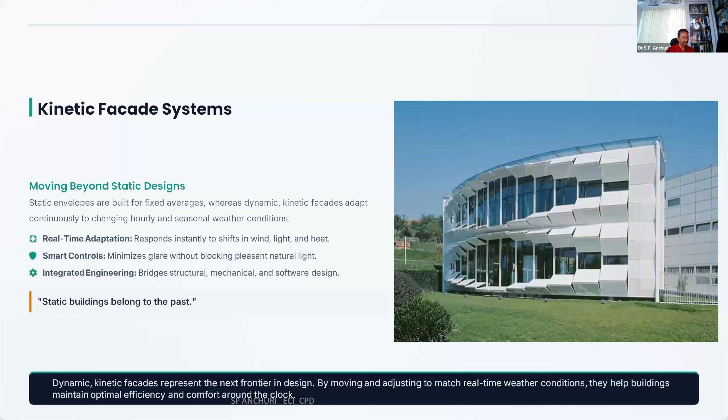Kinetic facade - you can just see, we have full glass in the night or evening, and then as per the requirement, the building gets closed, like shading. It tracks the heat and light, and accordingly this system is called a kinetic facade.

Now, when it comes to active glass, there are some glass - you may be having this shade which is photo gray or something, that is called. It becomes gray or dark when you go to the sun, and when it comes inside, it's clear. So based on the requirement, that glass can also give the particular ingress of the light and heat.

Double skin facades is a new thing. If you are pointing to HPL - high pressure laminate, ACP - aluminum composite panel, or some kind of additional cladding, we have an original structure, then you have some kind of a gap, and go for a next skin. That is double skin facades, which are designed structurally safe, because you have a tall building where the wind...

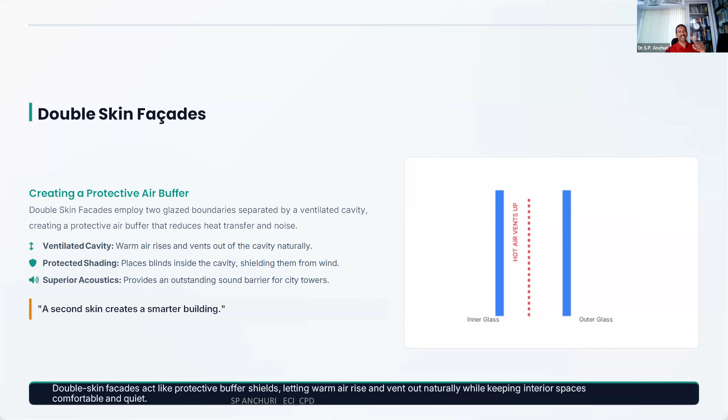Even if you see code 16700, which is the code for tall buildings, it has been very clearly stated which are the structural elements, which are the non-structural elements. So how to design that?

So here, BIPV facades - building integrated photovoltaic facades. Today we can have a glass which can even generate power, give shade, and act multi-purpose. This is the need of the hour, and soon it will be very comfortably used because it's going to be very affordable in coming days.

High wind and cyclone defense - the structure should be designed either in terms of form and geometry to resist the wind, or through the materials itself. If you don't have any choice to design with the shape and size, then your design should be accordingly. Climate resilience begins at the envelope stage only - the entire safety inside depends on the outside.

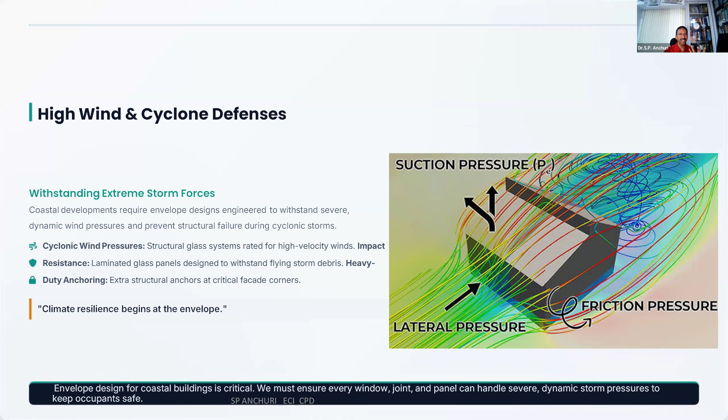Flood proofing lower floors is essential for urban resilience. Using temporary water gates or impermeable barriers helps keep critical systems safe and dry. Because today we are going two basements, three basements inside for parking, and at the same time we are going for lawns and upper floors with different challenging things. So we need to understand.

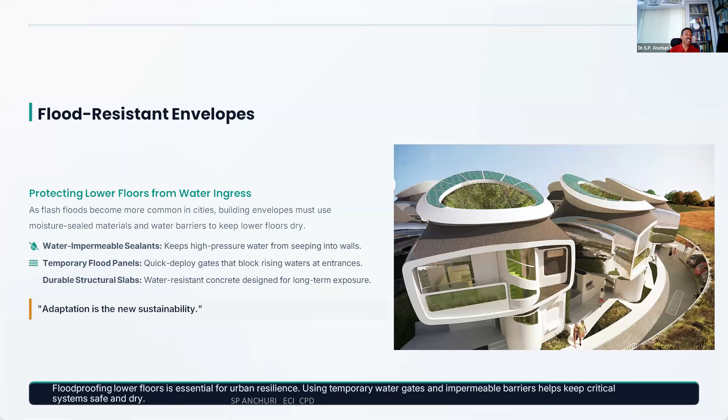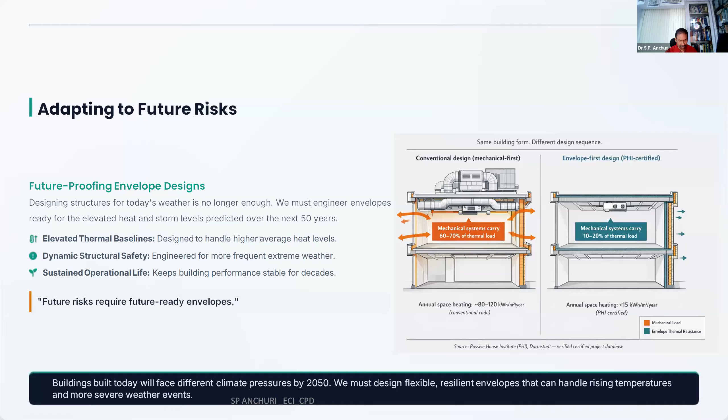Adapting to future risks - we need to anticipate future risks and design future ready envelopes. When I say envelopes, it's not having any limit, whether it's 2050 or 2070, but right from now, why don't you design resilient or future ready buildings?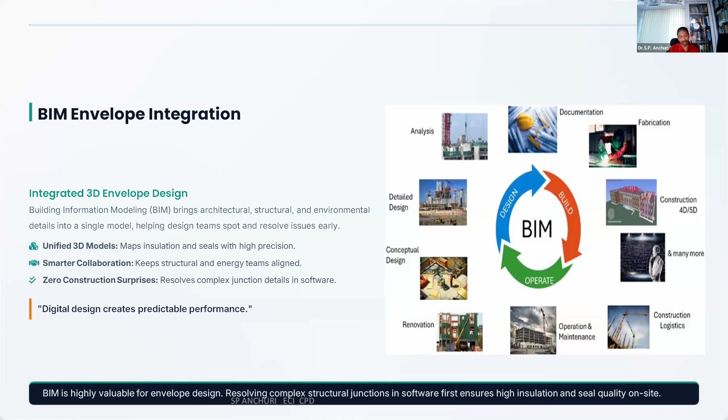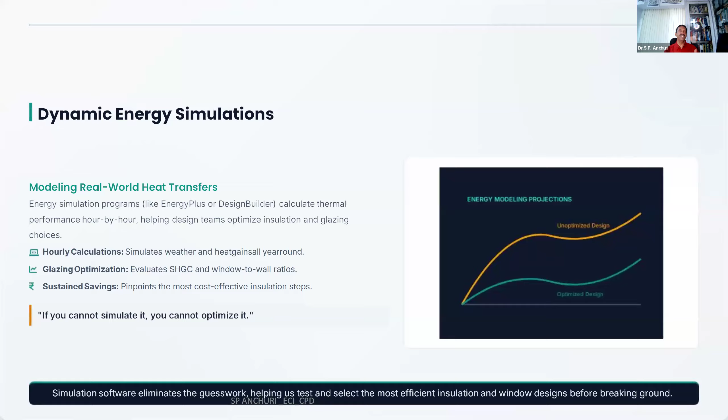So if today we are talking about future-ready buildings, I will just go through how future-ready buildings are there. Digital design creates predictable performance, so BIM is very important. Dynamic energy simulation can be helpful, because if you can't simulate, you can't optimize it, isn't it? Naturally we have to simulate - regenerative architecture is okay, but generative structural or engineering design is very important. So here you can do that.

So continuous performance monitoring - we shouldn't just build it and abandon it. We need to see, it's like a vehicle - when you are not operating properly, when you are not maintaining properly, how can it run? It won't even start. So the same with buildings - we take care of the building initially, then we ignore things, we hardly paint, we hardly maintain.

I think we need to understand the entire system - the building envelope is protecting us from outdoor conditions, indoor conditions, everything. And we are not caring about that. So we need to understand the importance of the structural system of the envelope and take care of it, so that we can monitor and perform well.

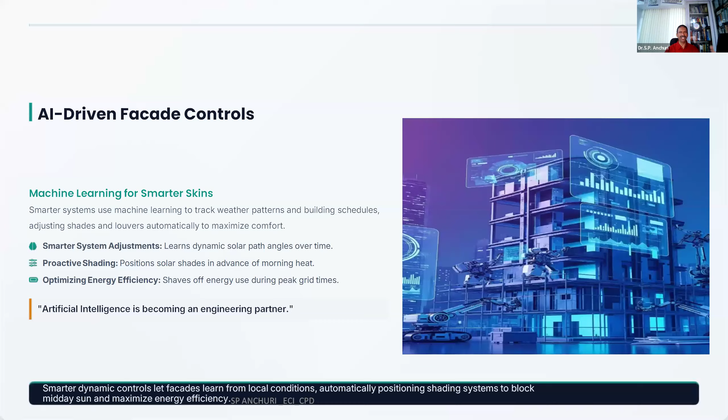So AI-driven facade controls are new in the market. We are using this in one of the hospitals, a very modern hospital, where artificial intelligence is becoming the engineering partner. We have digital screens which display outside, and at the same time, some facade systems which are controlled by AI. So naturally, what is AI? It's just also a tool which is programmed - it's artificial. Nothing big about that, but we need to integrate it. That's very important.

So ECBC envelope requirements - when I say envelope, we have requirements like maximum roof heat transfer, maximum wall heat transfer, maximum glazing transfer. When I think of glazing, I need to know the value of the glass. When I talk about the wall, I need to know the U value. When I talk about heat from the roof, for the entire envelope, I need to understand the building physics.

You can take another government building-based example - this is the Indira Paryavaran Bhavan, environment-based only. So it's a net zero building, which is having a shade on the top.

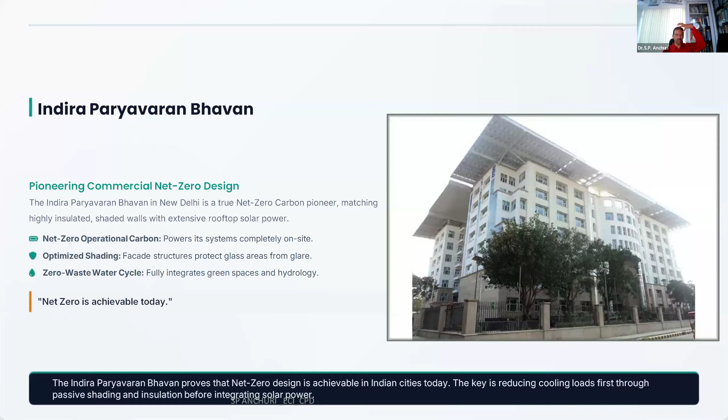It's like an umbrella on the entire building, which gives the shade. Instead of individual shades, they have planned one total big umbrella on the top. In Hyderabad Infosys building, you can see not many alternatives. They have used the radiant cooling system and a facade that gives shade, using material with a good required U value. So Infosys is one of the examples which is very good in envelope design.

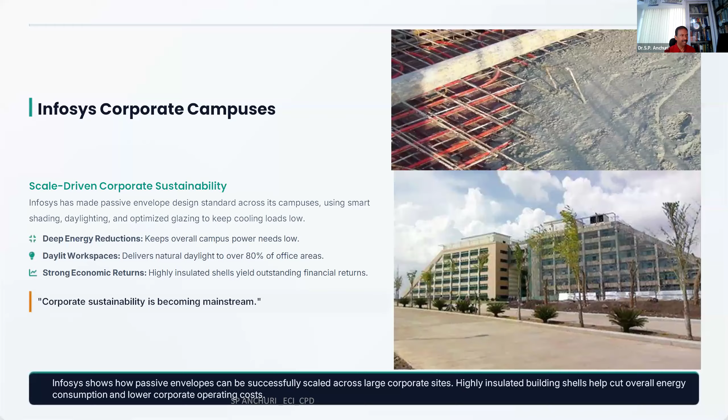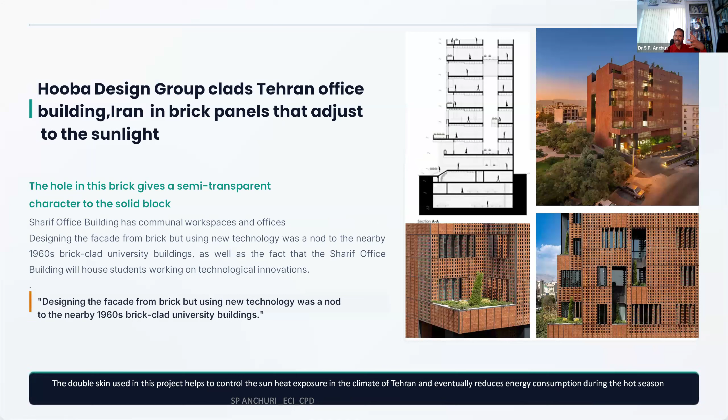And brickwork, Delhi and Chandigarh, we have a lot of terracotta. So you can have apertures in the terracotta, you can use those things. So holes in this brick give a semi-transparent character to the solid block. Instead of going for solid, they have made the structure in such a way that air will come, light will come, but heat will not come. That's the beauty of this particular project.

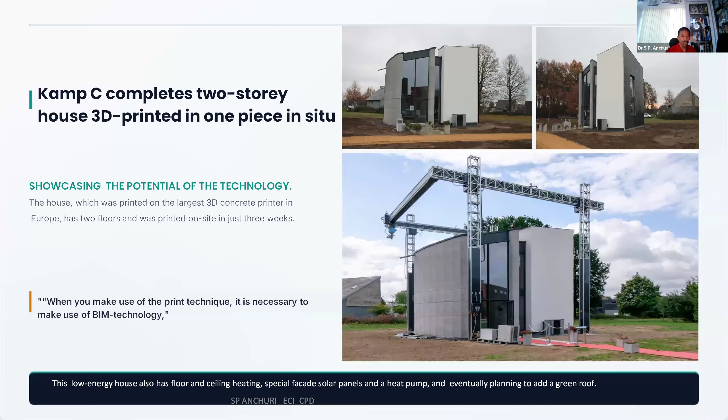Yes, construction technology - this is one of the best 3D printed buildings. It's a two-storied building, not like a three. If you see a typical 3D printed house, immediately we can identify it, but in this case it's not so obvious because it's a little advanced technology. All the people came together, and it's one of the best kind of structure. So we can go for affordable housing with 3D printing, which has a very good enclosure as a structure.

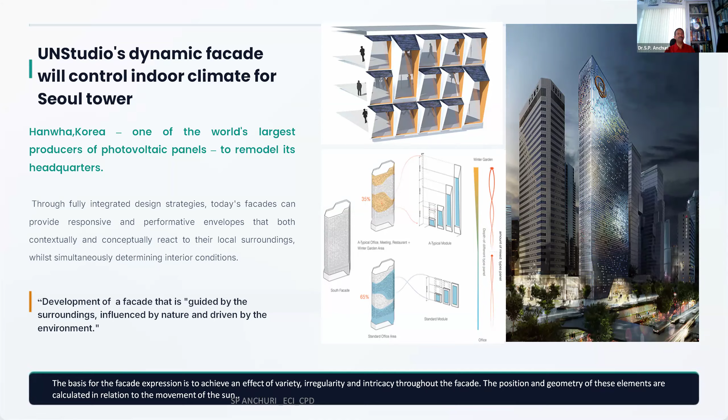Coming to one of the last case studies of mine, which is SAHI - we call it Society to Aid the Hearing Impaired. For infants who are not able to hear, they are tested here in their first month. This is a Switzerland-based firm which has ventured into Visakhapatnam with the help of the Andhra Pradesh government, and I was instrumental in conceptualizing this particular thing. Here you can see the need for that service for poor people - there is no financial cost involved. Any poor or rich person can come, get their infant tested, and then go for treatment outside. It's a research testing center.

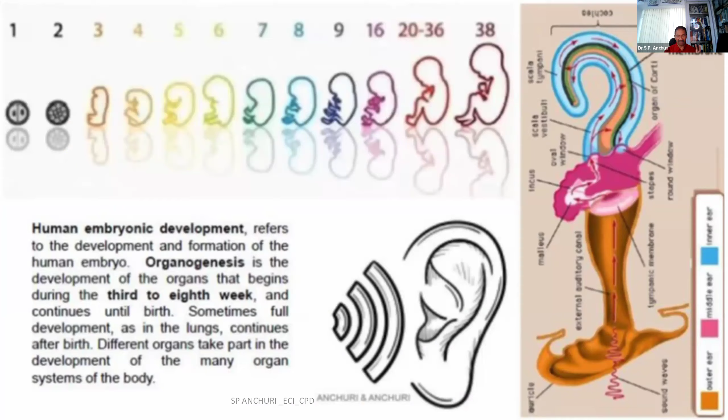So here I have used the golden ratio, which is seen in everything - in the conch shell, your face, and the pyramid. Convincing the doctors' team was a little challenging, but I used this Fibonacci sequence - 0+1, 1+1=2, 2+1=3, 3+2=5, and so on. I developed this shape and explained to the doctors the human embryonic development, how conception from the first week to the 38th week happens, how the baby develops, and how our ear or basilar membrane is shaped. Then I convinced them to come up with this particular shape for the building.

And we have almost finished the building. Even though this is very near the coast in Visakhapatnam, the way the air flows, it gets cool and comes inside. So I'm using hardly any active system inside.

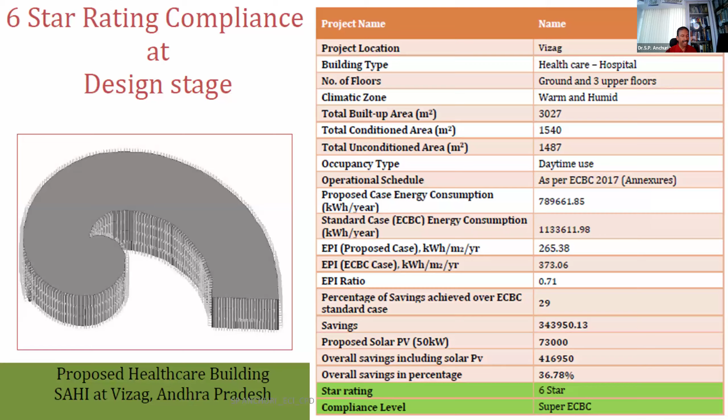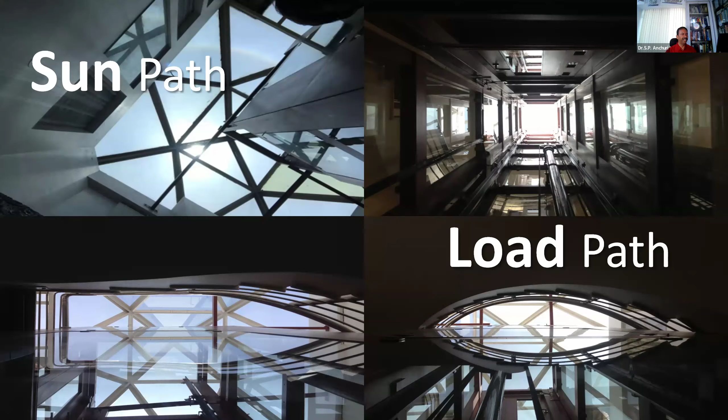So the SAHI Vizag, the regenerative architecture with a generative structure. Friends, this is my own small house, the central courtyard, where I studied the sun path and the load path. So architects, they understand the sun path, but all engineers must understand the load path. Electrical engineers should understand the electrical load, lighting load, and then structural or civil engineers must understand the gravity load or lateral load, the loading system.

The load path for fire engineers is the fire load. So all kinds of loads we need to understand, including the sun path. So here I wanted to emphasize that let us orient or study the sun path and the load path. With sun and load, definitely our building will be a structure which is very sustainable, future ready. And this is not new.

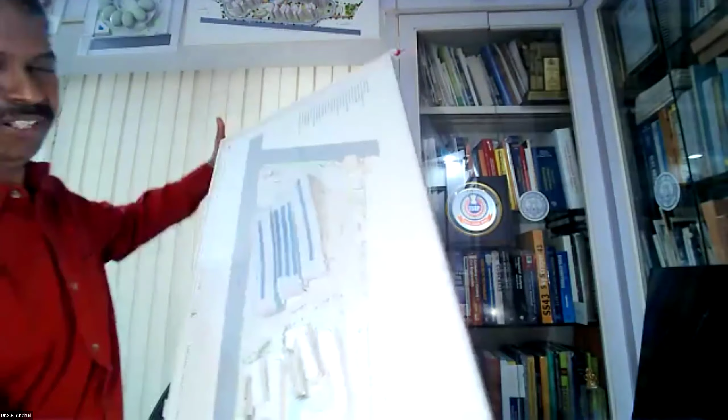I do a lot of physical models, in fact. So this particular thing, are you able to see it? So here it's a logistics hub which you can't see as a shed or something. It's very differently designed using what I was saying, the transdisciplinary concept. Logistics hubs or industrial sheds are not... See, we designed not many convention centers and all, but here you can see the shape of the building, the formation of the layout and everything.

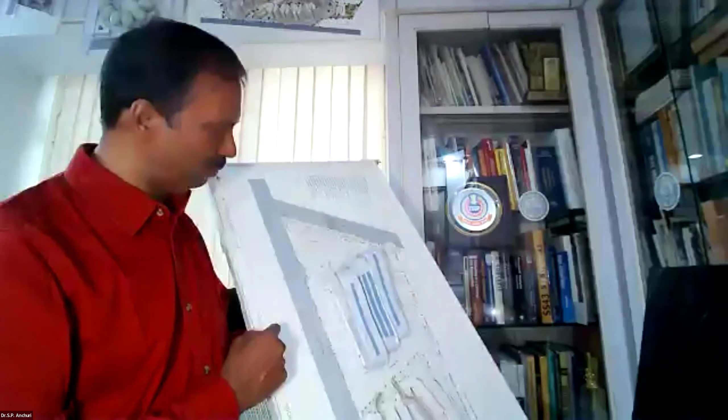Even in fact, it's a logistics area, they love to come. They wanted to put their material inside because it's a different shape. That generates the light, heat, and other things accordingly. It's a net zero logistics building which is coming up. So huge area, but the form is different.

So even when I spoke to all these manufacturers of the PEB, initially they were a little hesitant, but when I told them about the optimization of the structures, the same material, the same quantity of material, but a little complexity or challenge in the design, I think it can be done. And today, with the advent of mechanization, pre-engineered buildings, it's only assembly.

And in fact, I love parametric design because the human body is not like tubes and all. We have a variation of the section because of the optimization. So because of the manufacturing process, I can have a variation in the beams. We studied only column, beam, slab with the regular sections. But if you have the knowledge of joints, and if you take the help of the joint designers, experts like Hilti and Bosch, their team will support us in how to design the joints and the elements.

So I think one of the best is going to be pre-engineered buildings soon, and 3D printing for the low-rise buildings. And we are adopting such things; if you go for Zaha Hadid's forms, these are all optimized ones. Okay.